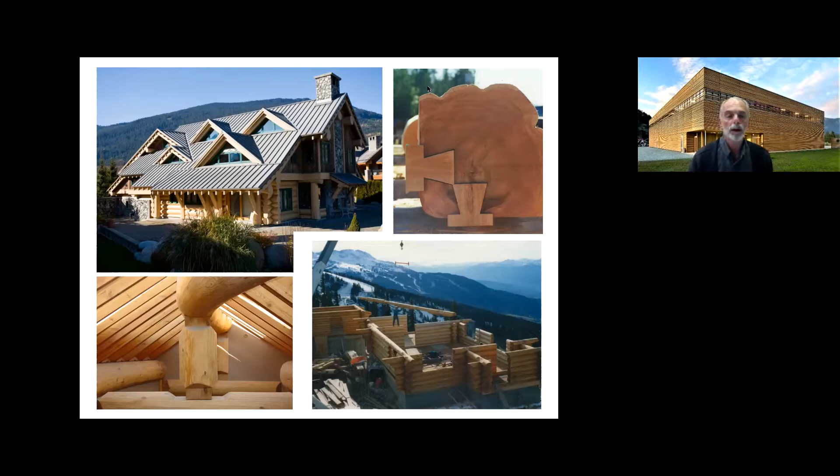Tourists typically came to our town to ski, but some wouldn't leave without having put in an order for a log cabin. We shipped log and timber structures to the US, Japan, and Europe. We specialized in working with wood and with a particular focus on mass timber. Exporting whole projects taught us that prefabrication makes sense and gives us great flexibility.

As our little town of Whistler grew, so did the size and complexity of the homes we built. However, energy efficiency was not every client's greatest concern. There were certainly undercurrents in the industry and in government sectors suggesting that we have to start building more energy efficient structures if we're going to address the impacts of climate change. As a company, we did our part and started taking courses in green building practices to begin to address these concerns.

I'm not sure what impact the 2000 Summer Olympic Games had on Sydney, but for Vancouver and Whistler, the 2010 Games were a huge success, and for 6 weeks, we were all caught up in Olympic fever. On a personal level, having Austrian roots, Heather and I viewed the Games through the lens of the Austria House. The Austrians have a tradition of erecting a building to house their team for every Winter Olympics.

There was a small group of Austrian entrepreneurs who heard that these Games were to be the first Green Olympics. So their response was, we will show the world what green is. They organized themselves under the banner APG, the Austrian Passive House Group, and decided that the Austrian National House for 2010 would be a passive house.

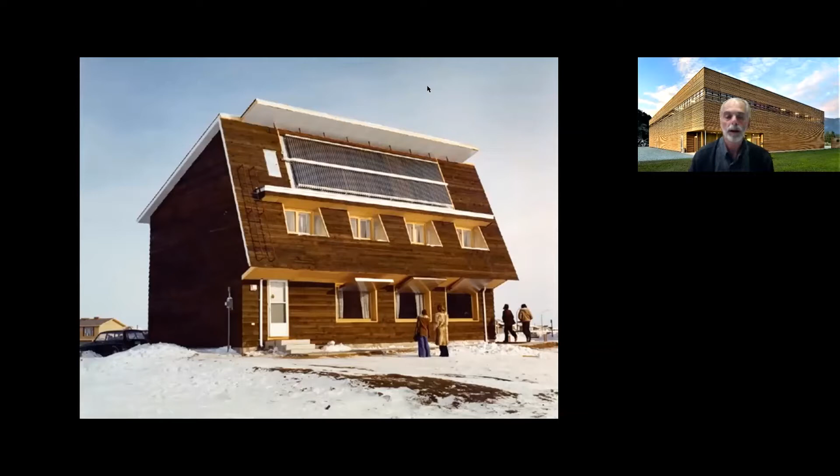I just have to interject a bit of Canadian history into this story at this time. We all think of the passive house concept as having originated in Germany. However, there are strong Canadian roots. This photo is the result of a federal government research project from 1977. The house was appropriately named the Saskatchewan House. For those of you who don't know, Saskatchewan is in the middle of Canada and arguably one of the coldest places on Earth. This house had triple glazed windows, solar panels.

It was the first house with an HRV built into it, and the first time a blower door test was employed. This was also the time of the oil crisis, and when we in North America realized that we weren't actually going to run out of oil, we abandoned the need for energy efficiency in either cars or houses. The Europeans, on the other hand, recognized that they had no oil supplies and began to study these types of projects. And as Germans do, they took efficiency to a whole new level. Thus, PassiveHouse was born.

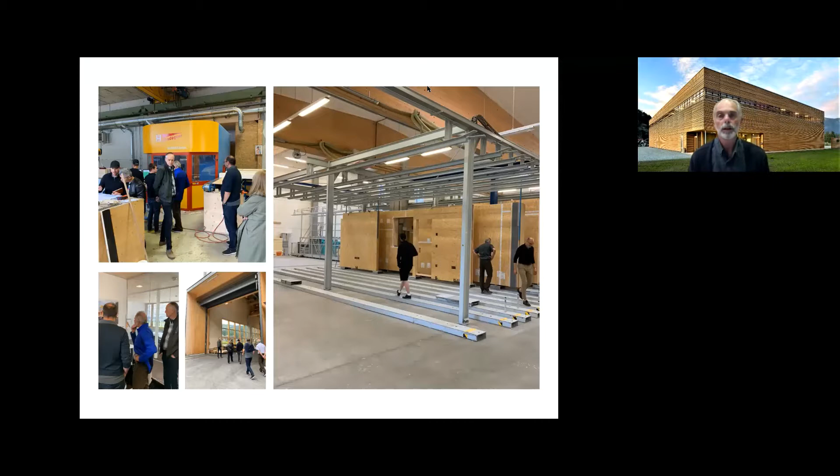Back to the Olympics. Little did we know that when a small delegation of Austrians came to visit us at our Whistler office a couple of years prior to the Games, what actually lay before us. They signed us up to be the general contractor for the project, and then invited us to go to Austria to go to their version of Passive House school. They took us to the factories, we toured their building sites, we ate their schnitzels, and we drank their wine.

The house was planned in Austria in collaboration with Canadian architects and engineers so that it would meet all our local codes. The house was fully prefabricated in Austria, so when the 6 containers arrived on site, all the components of the house were there and everything fit. We liked the fact that the house was built out of wood. In fact, the first CLTs and DLTs that were used in Canada were part of the Austria house.

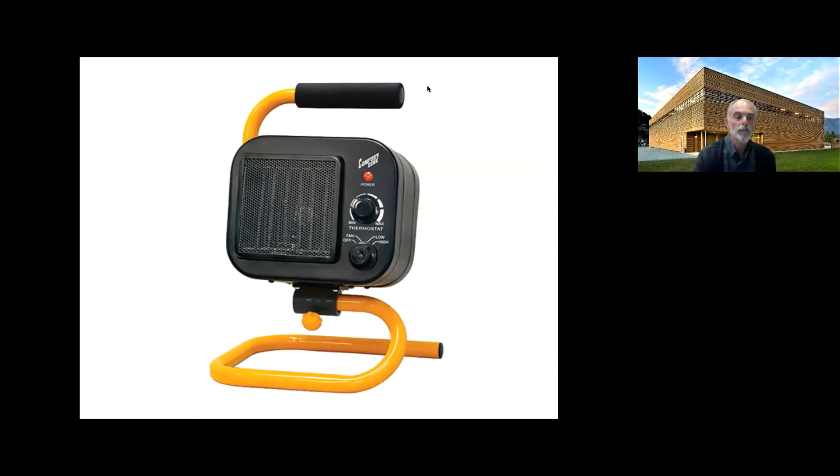There's always a moment in a journey when one realizes that it's worth it. My eureka moment came one winter morning. The house was at lockup and the blower door test had been completed. It was about minus 10 degrees outside and about plus 10 inside the house. The only thing heating this 300 square meter building was a small 1500 watt heater. Normally we have a big portable construction heater to heat our houses until the furnace is hooked up. I remember saying to myself, holy, this really works.

I suppose for this story to make sense to an Australian, it would have to be a hot day, perhaps 40 degrees, and the house would be 20 degrees inside with only a small chiller operating. When the Games finally came to a close, we had one final celebration at the house, and Tony, one of our guys, said, we should really build houses like this. We saw that this type of construction can be built primarily out of wood. It makes tons of sense to prefabricate, and it is super energy efficient to boot. It simply ticks all of our boxes.

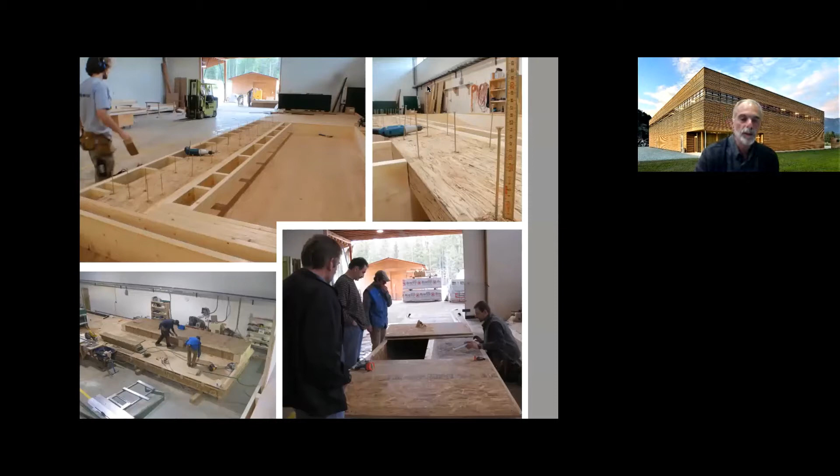However, that was easier said than done. It was great to want to embark on this new venture, but there wasn't anyone coming to us looking to build a passive house. You have to understand that the concept of passive house was still a foreign concept in Canada at the time. Not wanting to give up on our newfound dream of building to a completely new level, we figured the only thing to do to show people that it can be done was to simply build a house with local tradespeople and local products. So Heather and I bought a lot, designed and built our Rainbow Duplex project.

This became our flagship. We used the house as our demonstration house to show that buildings like this are not only more energy efficient, but more soundproof, have a much healthier indoor climate, and quite literally redefine our understanding of luxury living. However, still not so simple. We didn't have a facility where we could assemble such a project. The best we could come up with that we could afford was a 5,000 square foot warehouse space in Williams Lake, about 500 kilometers away. It wasn't equipped with all the tools and lifting equipment that was needed, but we would make do.

As often happens in life, one gets unexpected surprises. Things work out even without planning. We were confident that we would be able to figure out the necessary details to make prefabrication of panels work, and we would be able to figure out how to make the building airtight, even if it's something we hadn't done before. About the same time we were planning this project, we received an application from an Austrian carpenter with a work and travel visa, looking for short-term work. It just happened that Hannes had been employed by an Austrian company that specialized exclusively in building passive houses.

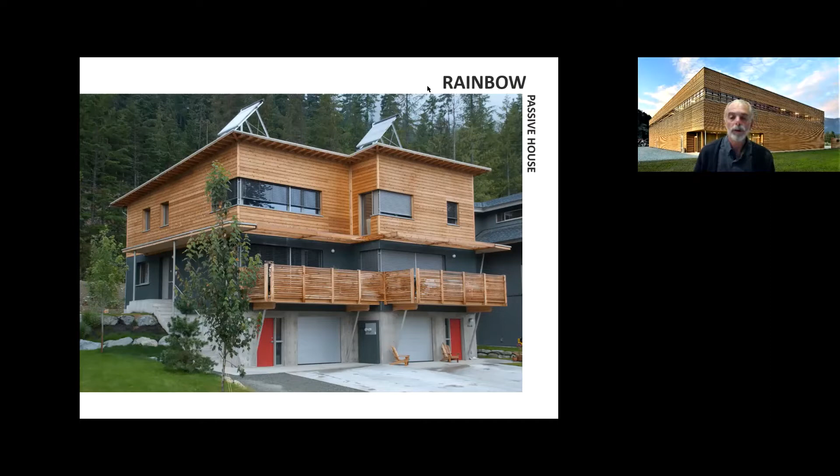Out of our little remote facility in Williams Lake, we began building one house at a time, and slowly but surely, we began to get a bit of traction in the market, and the passive house concept began to make sense to early adopters. I am now going to ask Lydia to take the narrative from here. Lydia and Kyle, who will touch on building science later, were our first employees and were hired specifically to develop Passive House in our company. Lydia.

So we had company buy-in, we had a product, we had a business, and we had a project demonstrating that we could meet the Passive House standard with our Canadian approach. What we didn't have was customers banging on our door to order our system. I'm going to speak a little bit to what we went through as a company, the process in order to grow, and also a little bit about what happened in Canada as Passive House was starting to take hold.

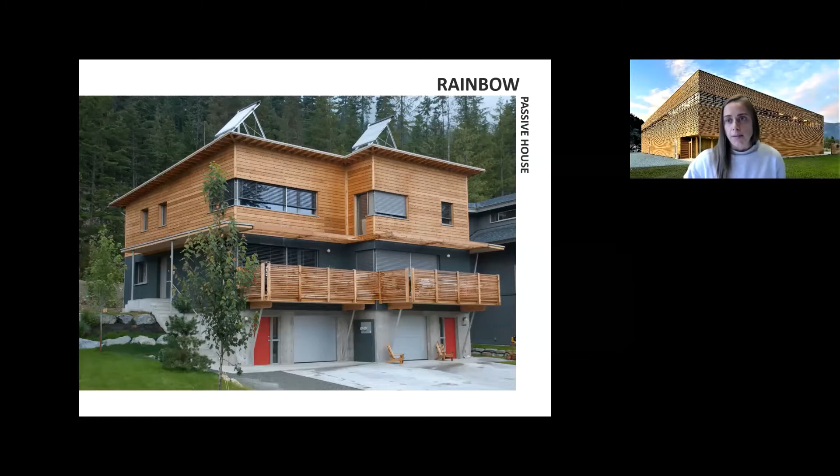We were a small company. We were building to a standard that, except for a small handful of people, was relatively unknown in Canada. So we had to convince people why they should be building to the Passive House standard instead of the numerous other well-known standards on the market. We were also building using a building method that was not common practice in Canada, so we had to demonstrate the benefits of prefabrication and why they should be utilizing that.

But we didn't just need to convince and secure customers. We also needed to convince architects and engineers, building officials, contractors and their subtrades, industry representatives and groups. We needed to sell the Passive House standard, BC Passive House as a company, and prefabrication. Above is just a snippet of the presentations we did in the first couple of years. Kyle, Matheo, and I were constantly on the road.

We would talk to anyone who would listen to us, trying to make sure that we hit all of the target audiences. We would do lunch and learns for architects and engineers. We would give presentations at conferences and to local interest groups. We would rent out booths so we could display at home shows. We would give tours of our active and completed projects as well as our facility. We'd give presentations to local municipalities and other government organizations, and wherever possible, we would speak to the media.

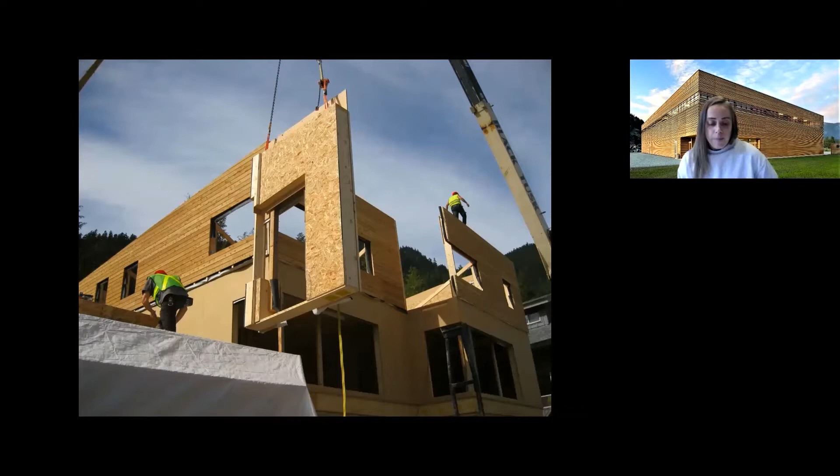Post-Olympics, we were in charge of the building from start to finish. We were able to choose our consultants. We had the benefit of working with a municipality who was familiar with the Passive House standard, had gone through the process of the Austria House, and who was also familiar with us as a builder, as we had been constructing in the area for over 40 years.

Outside of Whistler was a different story. We were dealing with varying levels of awareness of the Passive House standard, and we were an unknown entity. So our team would work with the design team right from the start, with the architects and the engineers, to work through our process and the details and make sure they understood our system.

We would also meet with the local building officials to introduce them to the standard, to our process, the system, and to make sure we got to a comfort level with the approvals that would be needed for offsite construction. And finally, we would work with the local contractor to make sure that they had the knowledge and the skill set to finish the project to the Passive House standard.

And you're going to hear this time and time again, and we cannot stress it enough. Put in the legwork up front. Make sure everyone is on the same page. It is one thing to design a Passive House, and it is another thing to execute it on the ground. You need to have buy-in at all levels, and you need to make sure that everyone is working towards the same goal. You're also going to want to make sure that you get municipalities involved early and be an open book with what you're trying to achieve.

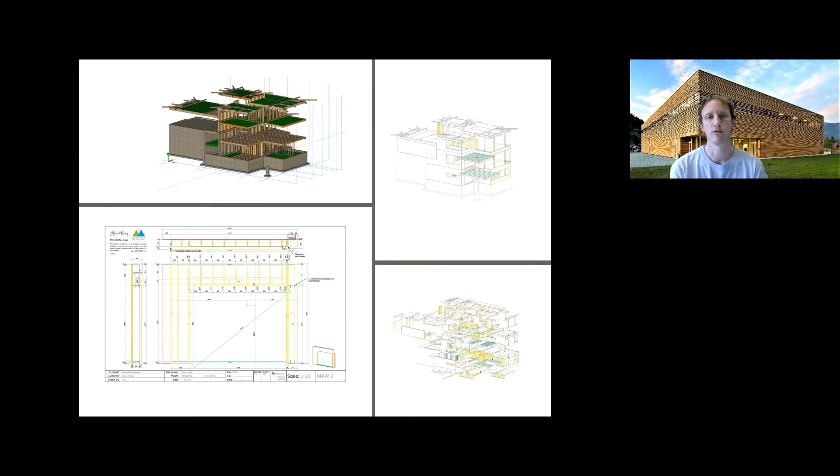The software then will allow us to put the drawings into 2D, which you can see in the bottom left corner, and those drawings will be handed down to our guys on the shop floor, and we proceed with the prefab process from there.

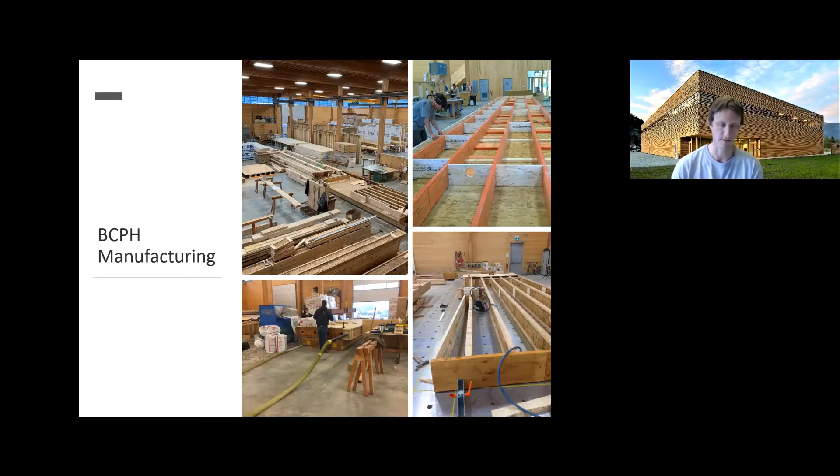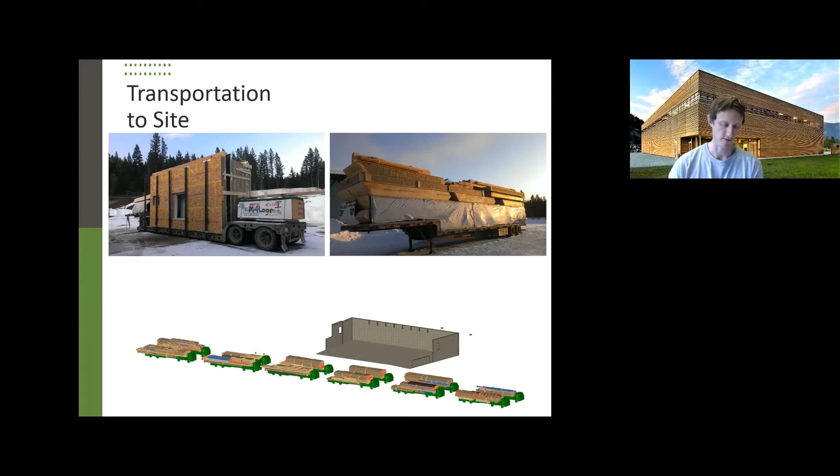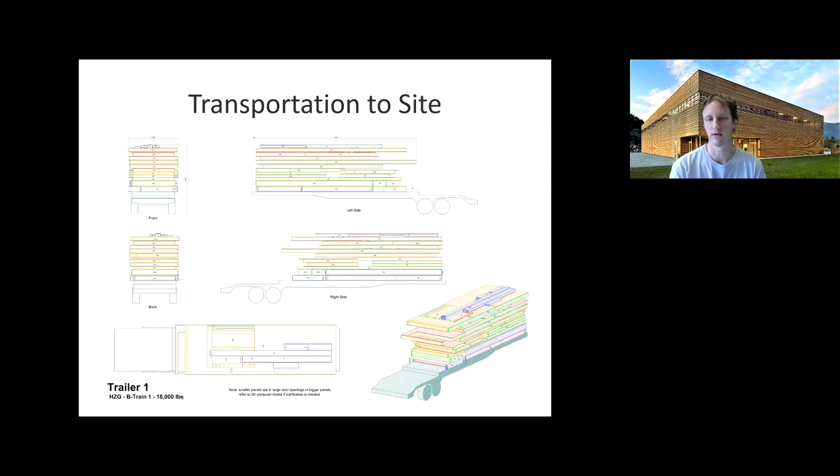And then we can actually model through our software program, which is called cadwork. We can model the panels in 3D and place them on trucks so that we can move our panels as efficiently as possible. So this is just a quick look at a loading diagram here. Again, this diagram will get sent down to the shop floor, and our team can get as much as possible out of each trailer.

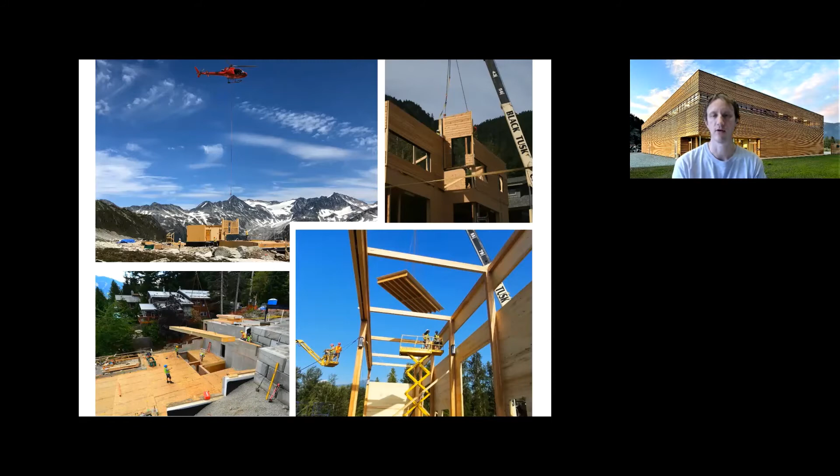And we've had lots of other interesting jobs as well. So you're looking at floor panels going in and roof panels going in. One house where we actually attached the siding on during the prefabrication process. So basically we were snapping together a house that was a finished product on the exterior.

Getting into the details a little bit and actually achieving the energy efficiency standards that we're going for. Air tightness is one of the #1 factors, and prefabrication really allows us to simplify this. On the left is a 3D model of the product that we would actually deliver to site, and taking a look at the inside as we're completing the envelope.

We're using OSB as the air barrier, and we're taping up all of the joints and seams in the OSB. And this is allowing us to reach blower door tests in the range of 0.2 to 0.3. The PassiveHouse standard is obviously 0.6, and this has been a very effective system for us.

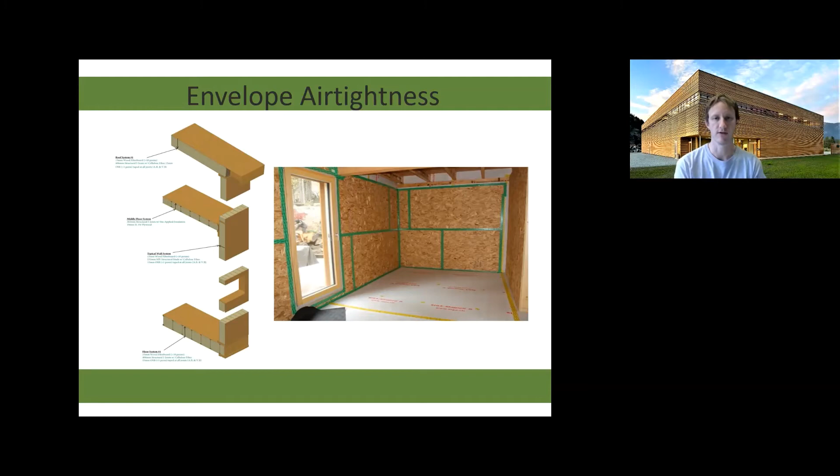And this is typically a double wall system that we're going to employ. So the taping of the OSB air and vapor barrier would be one continuous air tightness shell, and then inside that we'd then be putting in our service walls. So services for the building can come in at one location, and then we can run services throughout the building without continuously puncturing through our air and vapor barrier and compromising our energy performance.

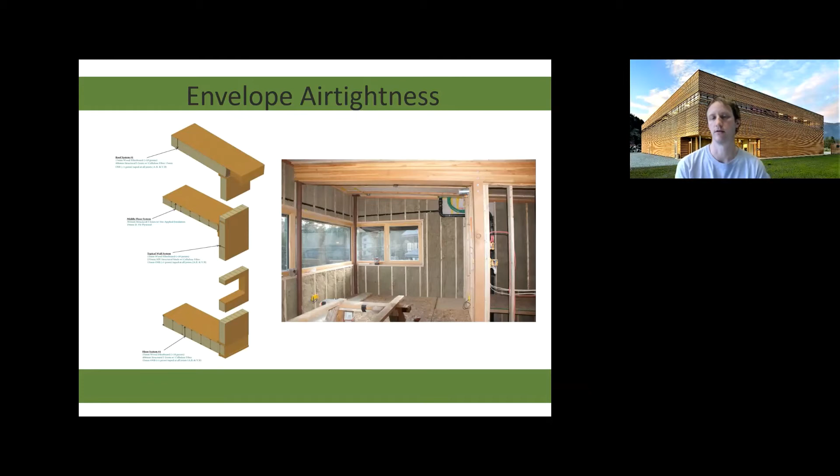So that wall can be insulated as well. Typically a non-structural wall, and that insulation pack can be added to our overall R value or U value for the shell and fit into our PassiveHouse model accordingly.

Thermal bridging is another concept that comes up a lot in PassiveHouse. We've had different ways of addressing this. One of the big things we're trying to avoid here is just beams, posts penetrating through the envelope and causing a major thermal bridge. So in this case, with an interior post, we built a pocket into the panel itself with the structure for the post in the panel, and then the beam can get dropped into that pocket on site.

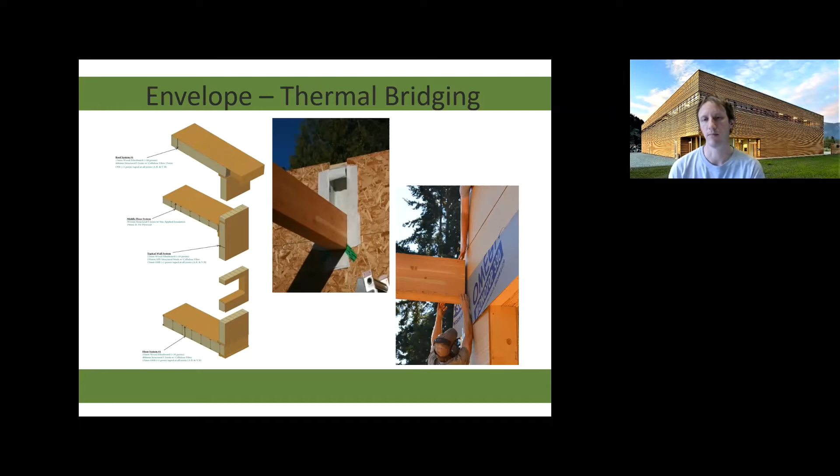For the exterior, we can put blocking in the panel and then hang our beam systems or have exterior post systems that pick up those beams. So again, we can kind of mimic the look of a beam actually penetrating through the house without actually doing it.

And then just a plan view of our typical wall structure here. So this is a 2x10 wall, which is, I guess, about 235 millimeters thick for the structural wall. And on the interior for this specific building, we've got a 2x4 wall that is also insulated, and that's the wall I was talking about before, the service wall.

We're typically using blown cellulose fiber in our panel system, and the key here is we can insulate the walls quickly using blown cellulose, and it's also just a good product for the environment. So it's a wood first product, and we'll try to use that as much as we can.

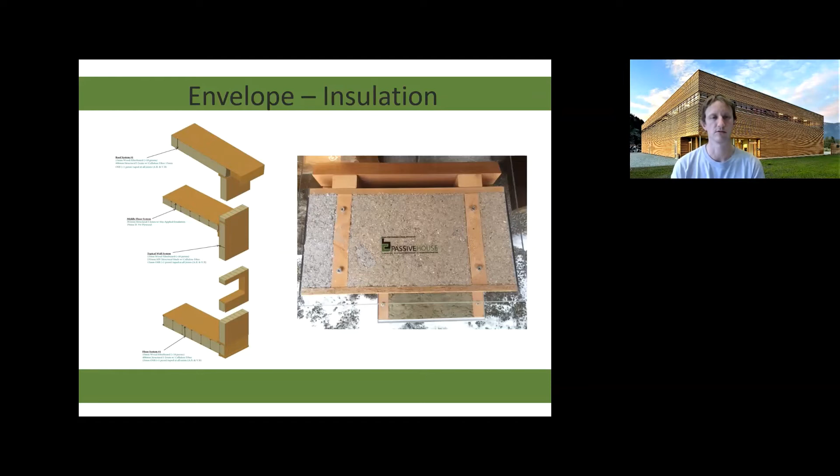And then moving on from the shell that we deliver to site to actually completing the house, BCPH is providing a structural insulated system, and if we're not acting as the general contractor, then the site general contractor would complete the house from our setup. We typically leave the house once we've put the package together and done waterproofing systems to protect the product that also form the secondary layer of waterproofing system for the house.

So the examples here you can see are a breathable membrane on the wall system, and then also a breathable membrane that would form the secondary membrane for the roof structure.

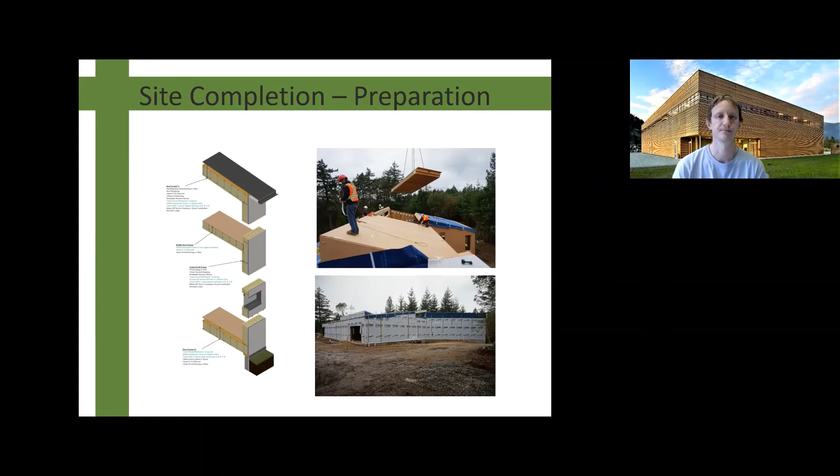Windows and cladding with PassiveHouse. I guess there's three key components to energy performance in windows. One is the glazing, the second one is the performance of the frame, and the third one is thermal bridging through the frame.

You can see here that this is an energy efficient window from OptiWin, a window we've brought in from Austria. It's a wood window that's aluminum clad, performs quite well, it's triple pane, and then you can see the details on the exterior where we're actually over framing the window and insulating outside of the frame to cut down the thermal bridge, or what's called psi installation in PassiveHouse speak.

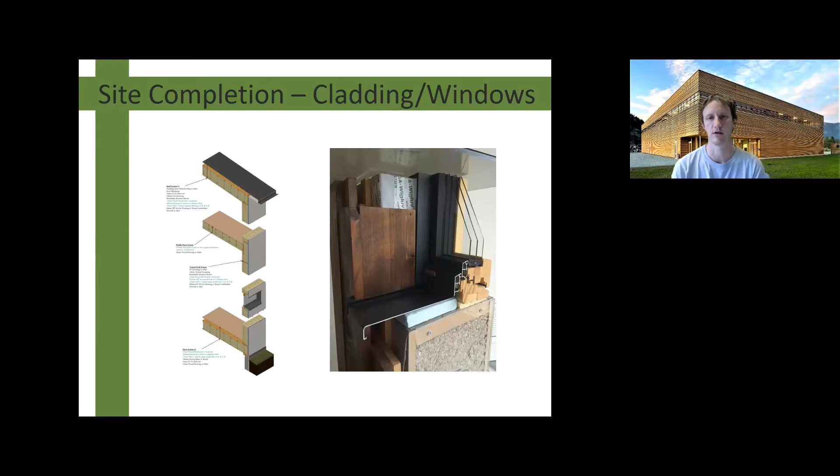We talked a bit about reducing energy use throughout the building's lifetime. We also talk about life cycle energy, which is the next thing that seems to be in discussion here in British Columbia, as it concerns how much energy input you're putting into the building when you build it. And for us, our focus has always been wood first, because that's seen as a carbon neutral construction material, whereas steel and concrete are not so much.

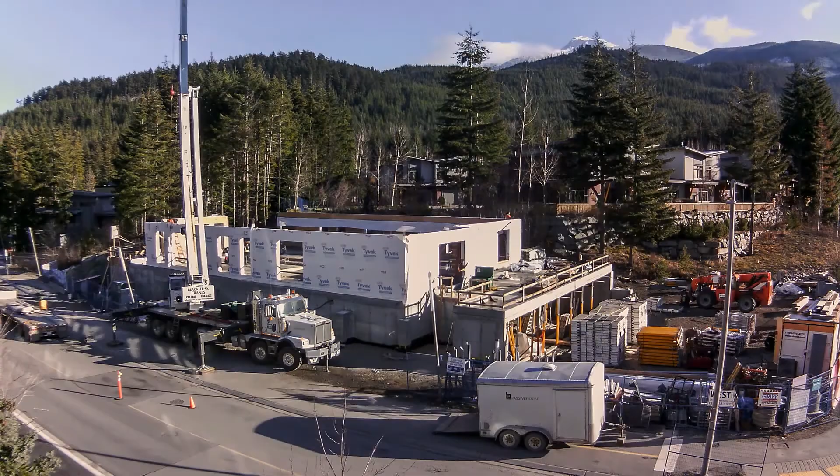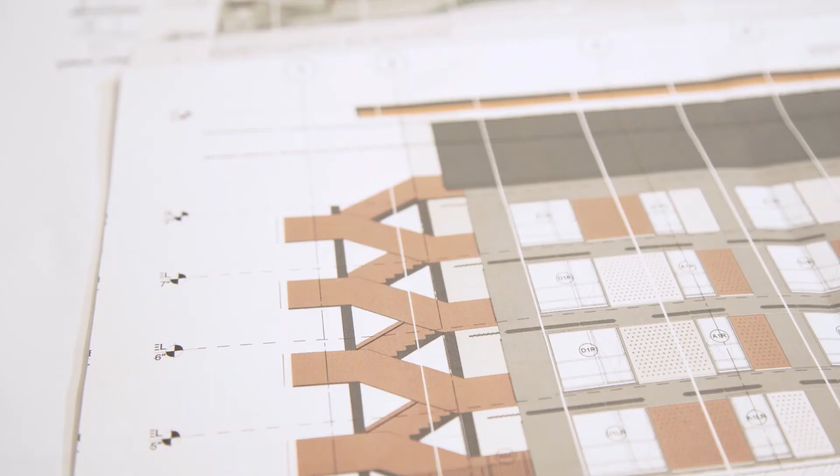The very first step is I get in contact with the architect, the designer, and with the engineer. We're having a kickoff meeting where we design the panel layout, what BC PassiveHouse is building and what is built on site. The project is in Cheakamus in Whistler. It's a 4-story building with 24 units where we deliver the exterior walls, the load-bearing shear walls, the subfloor panels, the stairs and the roof panels. Once I get the approved drawings back from the architect and the general contractor, this is when we start ordering the materials and start producing single shop drawings.

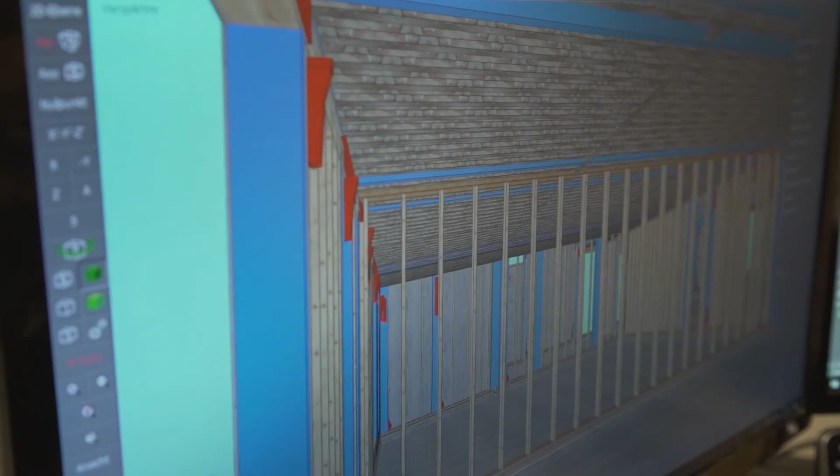We have optimized cutting lists as well. From this 3D model itself, we can produce material lists for the wood supplier. We have optimized cutting lists for the production as well to create minimum waste, and single panel drawings with the weight on, and on top of it loading plans. Then there are no surprises. Even on site, we know the crane location, we know what size of crane we need based on the panel weight. This building has over 200 panels where the average panel is 40 feet long and 12 feet or higher, and around 2,500 to 3,500 pounds, which we erect with the auto crane on site.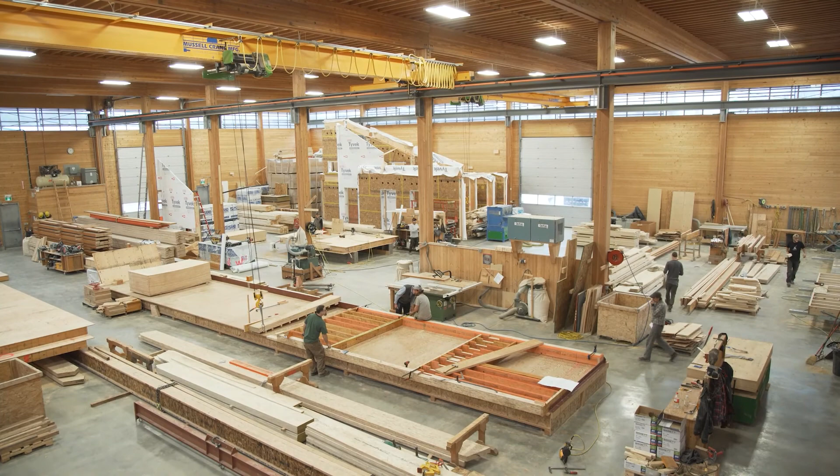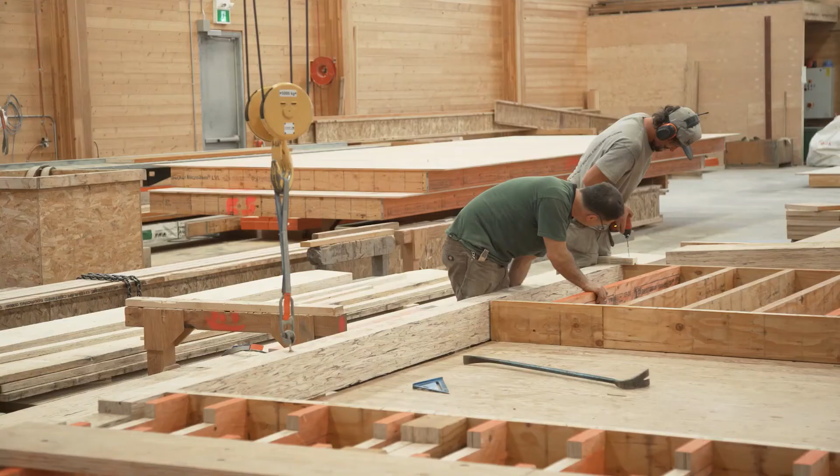Currently, we're focused here at BC PassiveHouse on a project with Whistler Housing Authority, which is an initiative for affordable housing in Whistler. Building our products with a roof over our head means that we have a controlled environment to assure that our structural components are where we want them to be. Using high-tech equipment and digital systems, we can ensure that our panels and our systems are built effectively and accurately.

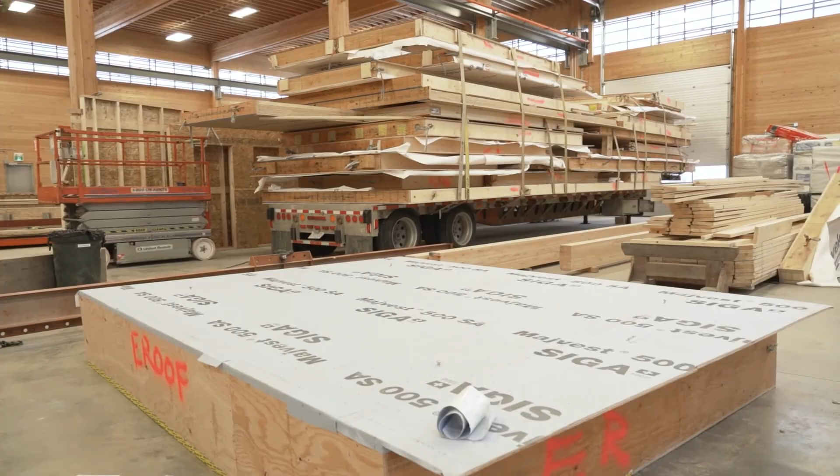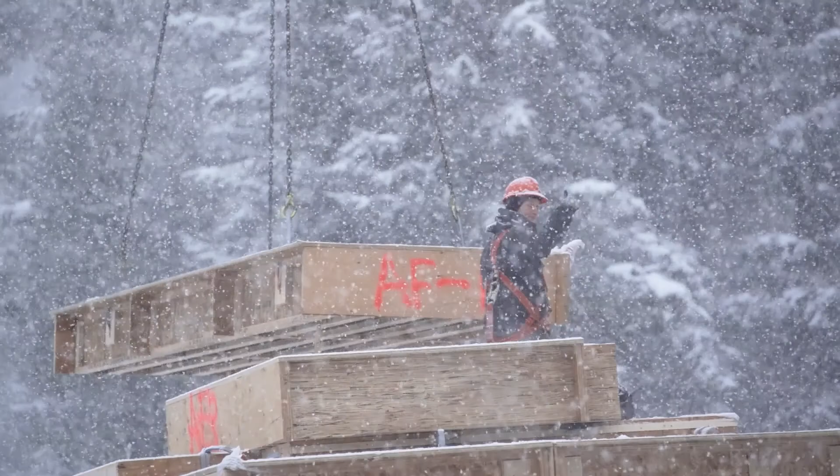Our panelized systems are fully waterproofed in the shop so that when they get to site, we have control over quality for our product on site. So the legacy apartments will be built to the PassiveHouse standard. This is a comprehensive modeling system that has become the gold standard for energy efficiency in construction.

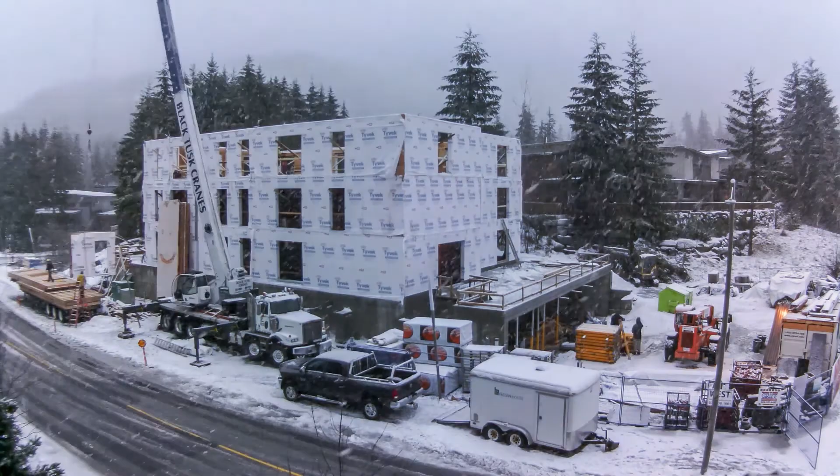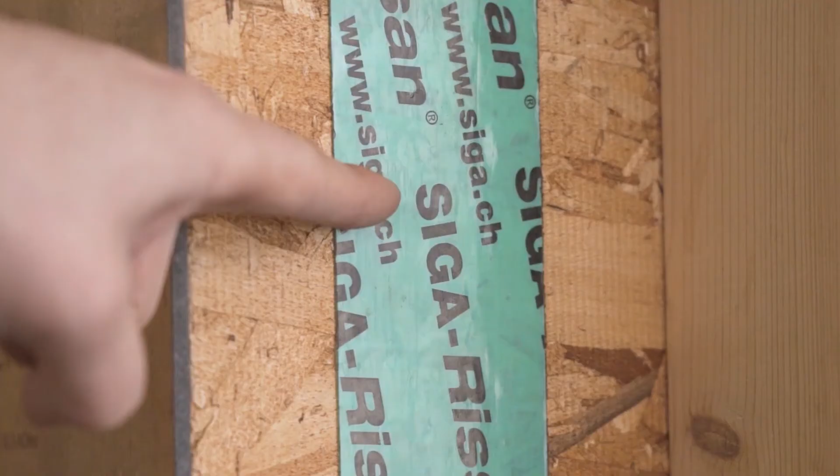BC PassiveHouse will look after the envelope component of the system, and the three key principles here are increased thermal insulation, high levels of air tightness and reduced thermal bridging. So the legacy project uses a double wall system. The structural wall is the component that you'll see during the setup phase.

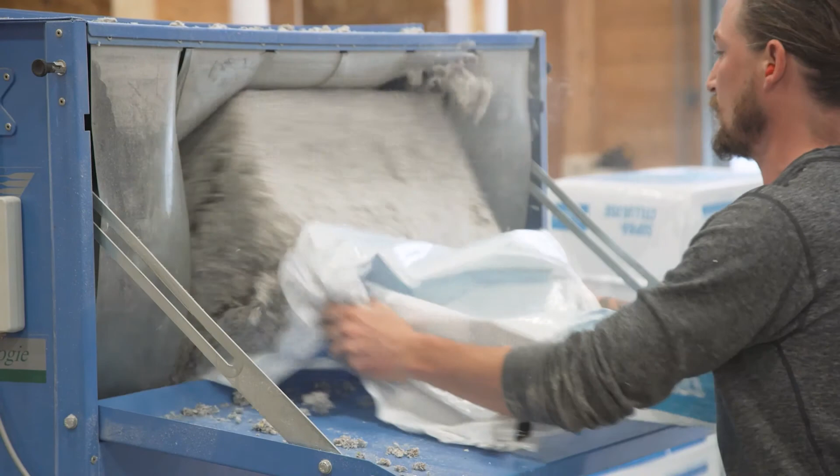This is a deep stud wall system that is insulated in the shop with cellulose fiber insulation. And then there will be a secondary wall that's framed on site that will be insulated as well, and that will complete the insulation pack of the building.

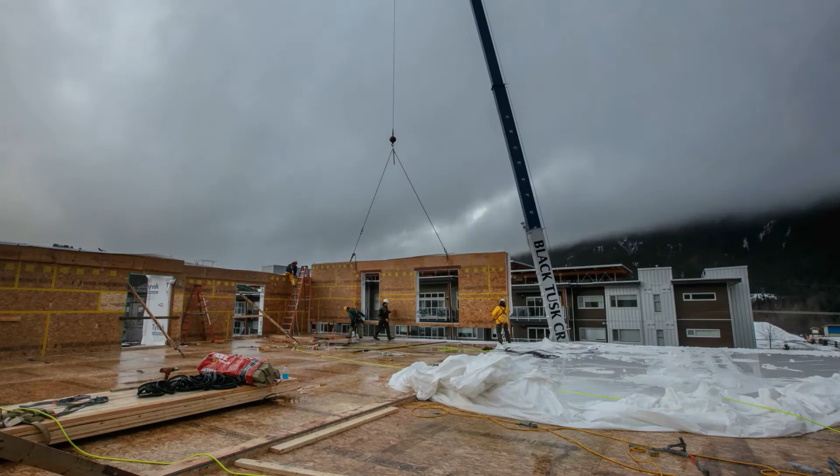My role here as project manager is to oversee all the various trades involved with the project. We started here at the same time BC PassiveHouse started in their factory. While we were building the foundation, working on the concrete, BC PassiveHouse was fabricating panels in the factory.

So the first step is to come on site and with survey data install the plates, wood plates on the concrete to make a very accurate starting point for the panels to be installed. The next step is to bring in the panels and start assembling the building. Obviously, it's really nice to do that in good weather, but we have to make arrangements to be able to proceed, or at least be able to protect the building during those weather events.

Thank you for indulging us on our little journey. As you can see, Heather and I did not travel this road alone. We had a group of dedicated, engaged staff. You can see that in Kyle and Lydia, and they're really just the tip of the iceberg. I mean, it was a whole group of us that did this.

If we have any advice for you, it would be simply, you don't have to do this alone. You don't have to invent anything alone. There's a wealth of information out there. Copy and adapt. A lot of people have traveled this road before, and they are generous. Just be gracious. People like to give when you're gracious.

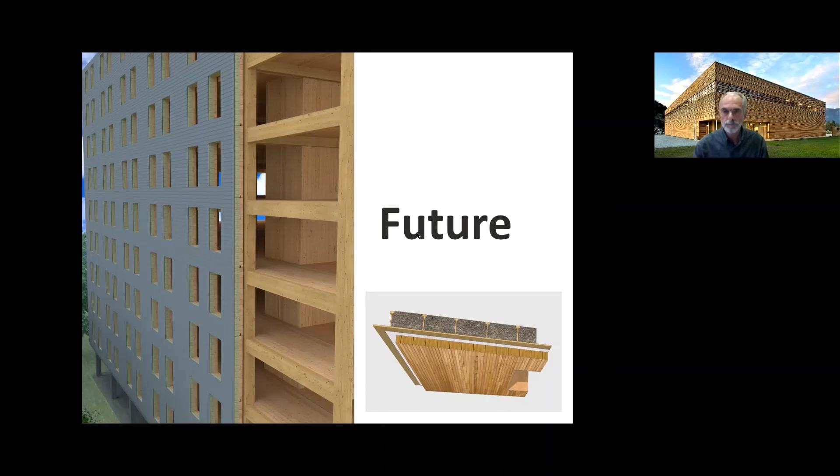So guess what? Our current facility is a bit small, and we are in expansion mode. We have to add equipment, we have to add tools. We're adding about 2,200 square meters. In order to do what we're planning to do, we've outgrown our current facility. So here we go again, and for the fun of it, we're gonna play a little video that we took a couple of months ago when we first set up the panels.

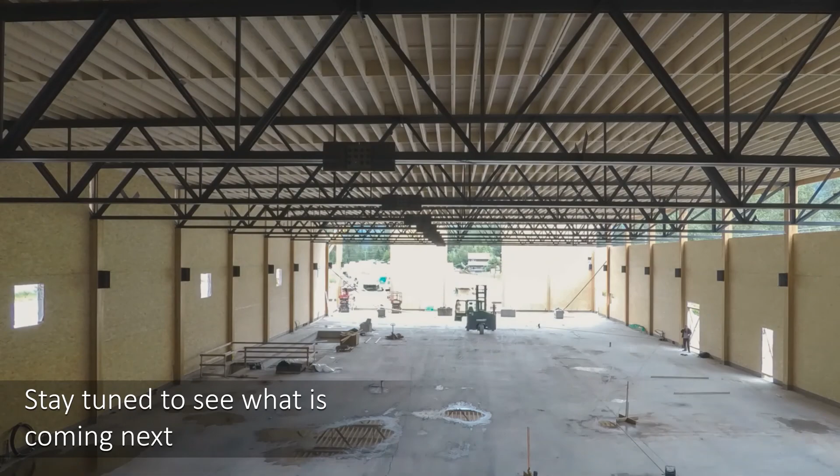To leave you with some advice that one of our mentors gave us when we first started our own journey. And he said, if you want to go fast, go alone. And if you want to go far, go together. We wish you luck in whatever your journey is.